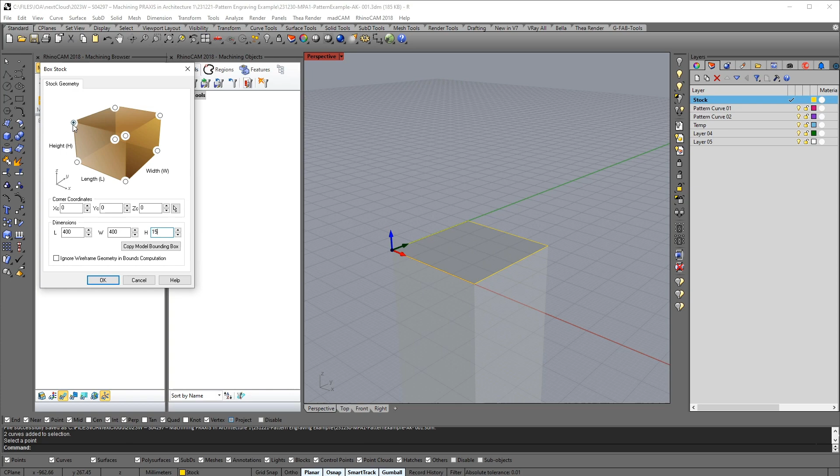And then I define the stock. I pick the upper point and the 0, X0, Y0, basically 0 and 0, 15 millimeters height, 400 by 400. If I click here, I'll get an update. Okay, so here is my stock. The color of stock in my RhinoCAM is different. I changed it. If you have the default settings, probably you have it in orange color.

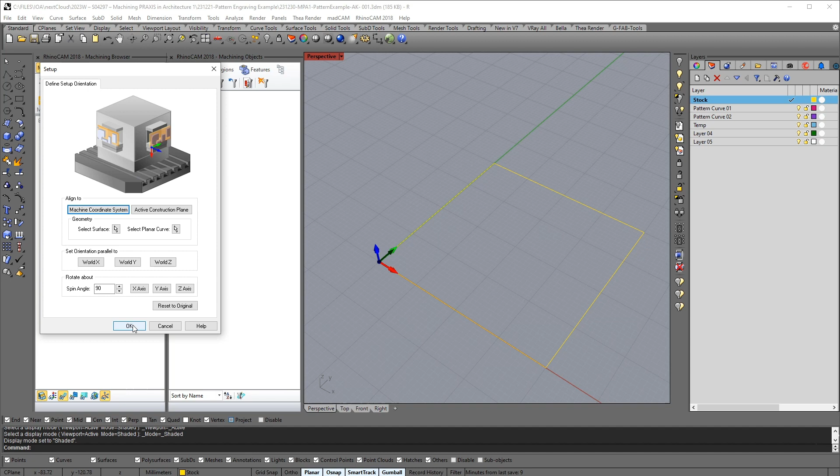And next thing, we need to make a setup. So click on the setup, make a setup. You don't need to change the settings right now because we are going to go with the default settings for a 3-axis milling. Okay, and renaming this setup. Okay.

Let's make a few tools that we are going to use in this video right now. So create edit tools. The first tool that I'm going to make will be a ball mill tool. It would be, let's say, 19 millimeter ball. And so the holder diameter which we have here is 35 and 25.

These two values are really important, these holder diameter and holder length, in 3D operations. So you need to be really careful about them when you're engaged in making 3D operation files. Here we are basically producing a 2D operation, so whatever you put here doesn't matter that much, but get used to using proper values. So the shank diameter for my tool is 8 millimeters, the tool that I'm going to use here, and the tool diameter, as I said, it is 19.

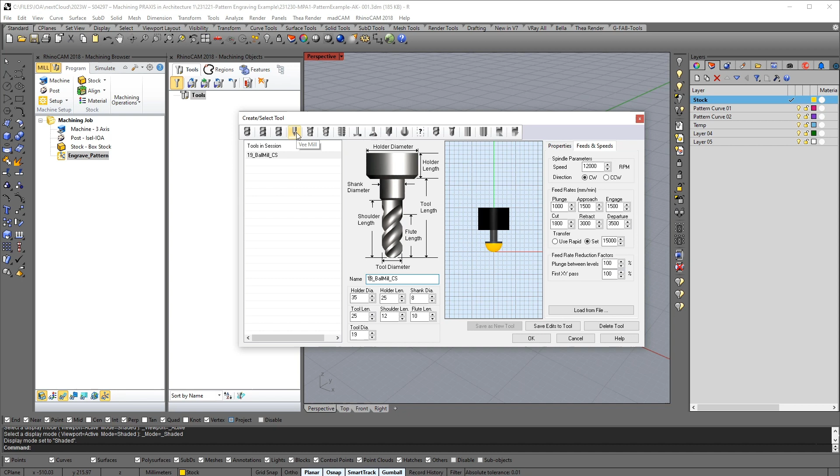And then I'm going to make another tool, this time a V-mill actually. So it's a 90-degree V-mill. So the holder diameter again, 35, 25. Shank diameter 8.

Taper angle is 45. Basically, we call this tool a 90-degree tool because this degree is 90 here, but the taper angle is the angle here. So you need to make sure that it is half of the real angle that you see in the specification sheet of the tool.

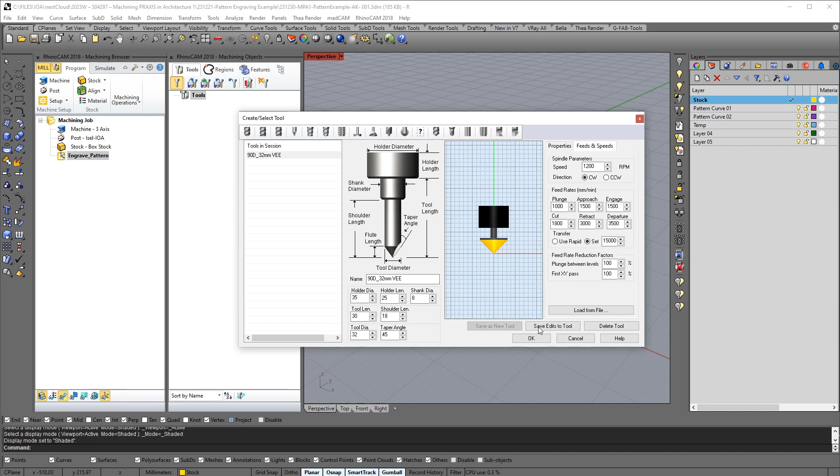So make sure you use save as new tool, because right now, if you save edit to tool, it might save it on the previous tool that you had selected. So save as new tool and click OK. Now we have two tools saved here and we can proceed.

Okay, let me draw two curves here. I'm going to use this curve. So let's say 100 millimeters away from the boundary. I move it to my pattern curve, and then let's make another one as well. Okay, two curves. Okay, so I'm making two operations.

First one, two axis engraving operation. We select this one for the first operation. We choose the ball mill 19 millimeter and the speeds you load from the tool. And sorting, we have only one curve, so we don't need any sorting. Entry, exit, none, that is fine for this operation. Cut parameters, tolerance is okay.

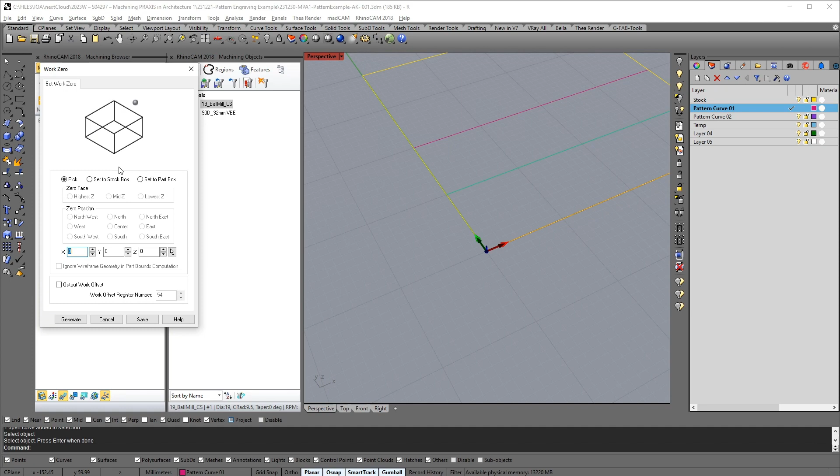Cut direction, natural. And this is important. Location of cut geometry at top. So this is my stock. And you saw that the 15 millimeter of the stock is below 0. And one thing I forgot to do here is to define the XYZ, the work 0 plane. So I save this at this moment. I just go back and I make a work 0. Select that. This is the work 0 that I'm going to use.

Generate. Make sure this work zero is not under your operations and it is above. Otherwise, it doesn't affect your operation and it affects only the operations that are below that. And every time you change the work zero, you need to make sure that you regenerate your milling operations. Right now, we basically just saved it and we didn't generate anything, so it doesn't matter.

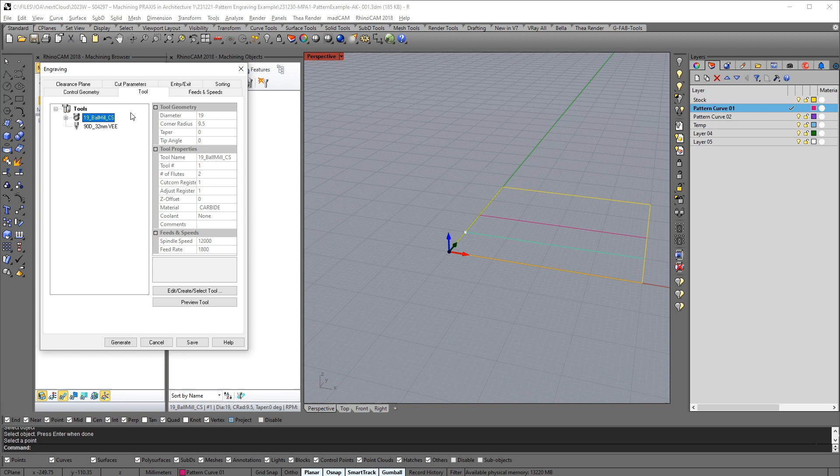We double click on the operation and we go back to the operation to define the settings. So in the tool, we have the 19mm ball mill selected, feeds and speeds according to the tool settings, sorting, nothing, entry exit, none, cut parameters, natural, and location of cut geometry at top.

So the stock is below zero, and so location of cut geometry: my curve is on the top. If the curve was at the bottom of the stock, I had to choose at bottom. So these are settings you can check on your own later, but for now at top is okay. And then cut depth control, total cut depth, rough cut depth, and finish depth. This defines the depth of my cut. For the first operation, let's choose 5mm, and we cut this all at once.

And then clearance plane, never use automatic, that's dangerous, specifically if you have a messy file and you have a lot of things there. The best options are part max or stock max or absolute Z value, every time you know something about it. So stock max, we defined this stock and we know that, okay, 12mm above the stock, that's a safe plane and it's fine for us. And cut transfer method in the clearance plane.

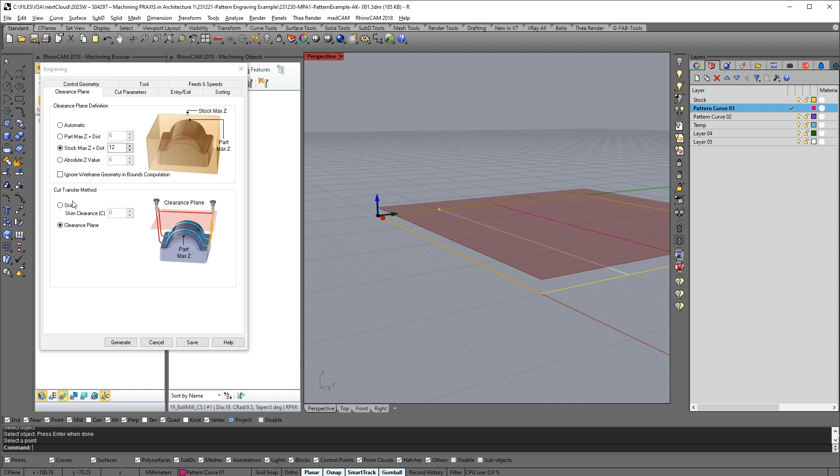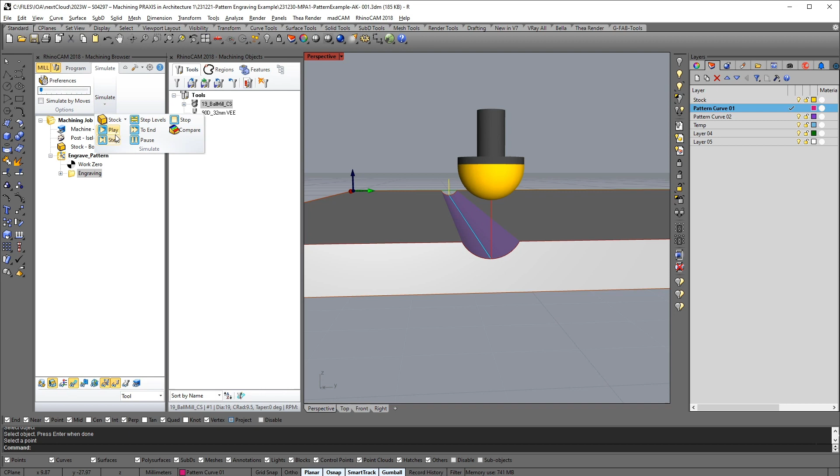So every time it goes to the clearance plane, I explain the scheme in other videos, and now we generate that. So here we have the tool path, if we turn it on or off, and if we simulate that, you see this is the effect of my tool. Let's make it slow. So this is what happens to the material.

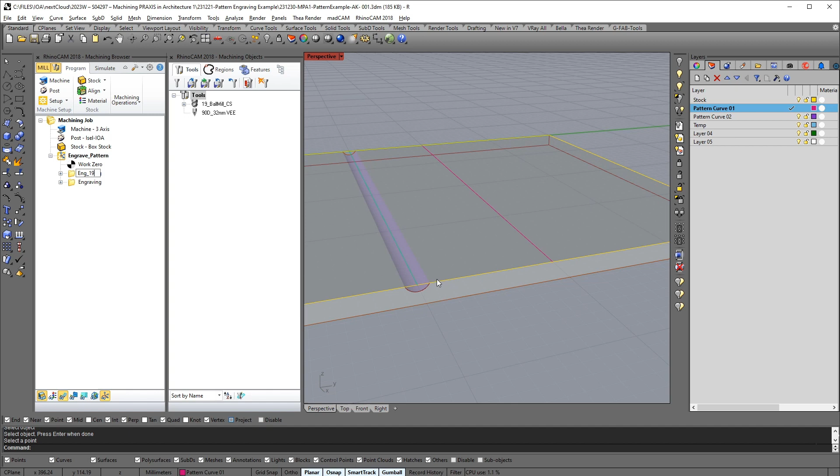Now imagine that we make the same operation with another tool. Actually, I can Control C, Control V. Let's make this Eng_19mmBall, and this one Eng_90DVEE. Okay. So this one, I remove this control geometry and I select another one, this one, and I change the tool.

And let's choose a different cut depth. Here I choose, let's say, 10mm. And I cut everything all at once. So 10mm rough cut, and then rough depth 10mm at the same time. Let's see what happens.

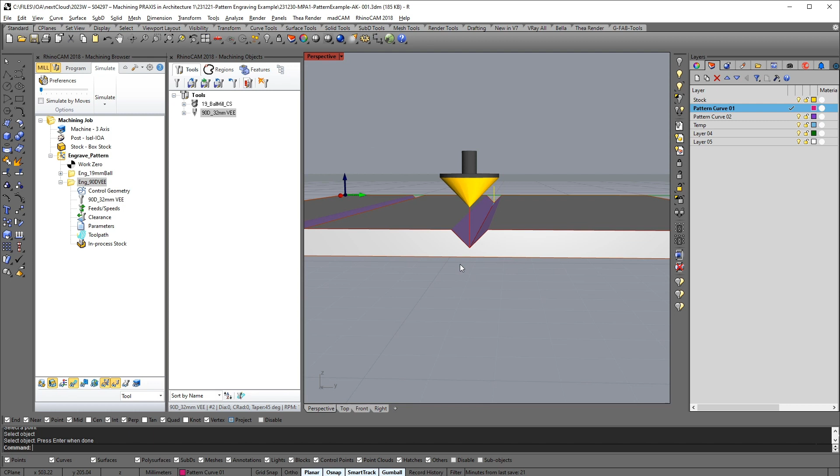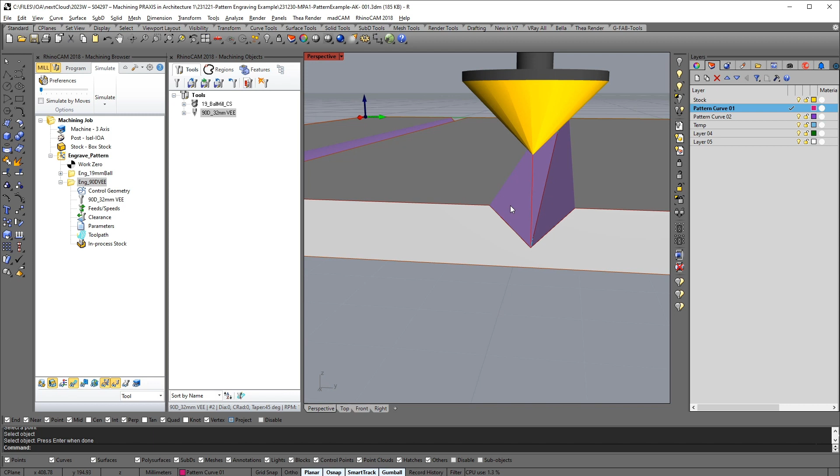Here we have a V. First thing to know: sometimes this is a lot of material for the machine, for your spindle, to be removed all at once, and it can damage the tool or burn the piece or burn the flute of the tool, so many things. So you basically need to divide these into two or more passes.

So what we do, we go to the cut parameters, and we can divide these 10mm. For these 10mm, two passes should be fine. And because our tool is a V-mill, the first pass can be deeper and the second pass should be less deep, because the amount of material removed with the first pass is less because of the tip of the tool, and when you go deeper it removes more material.

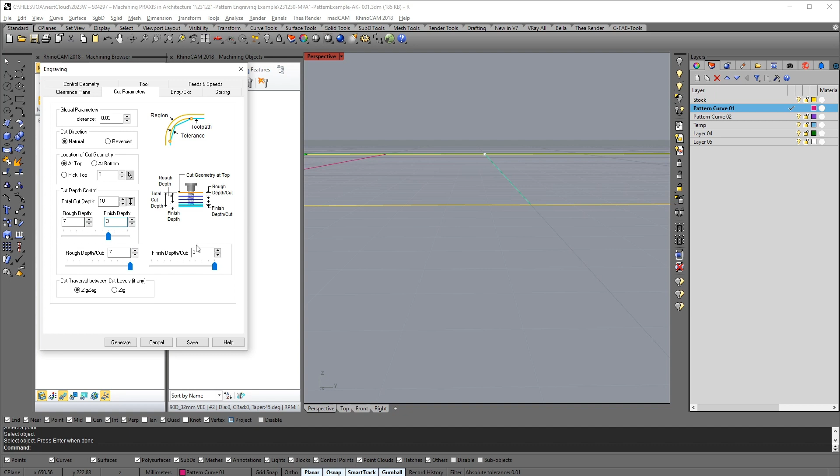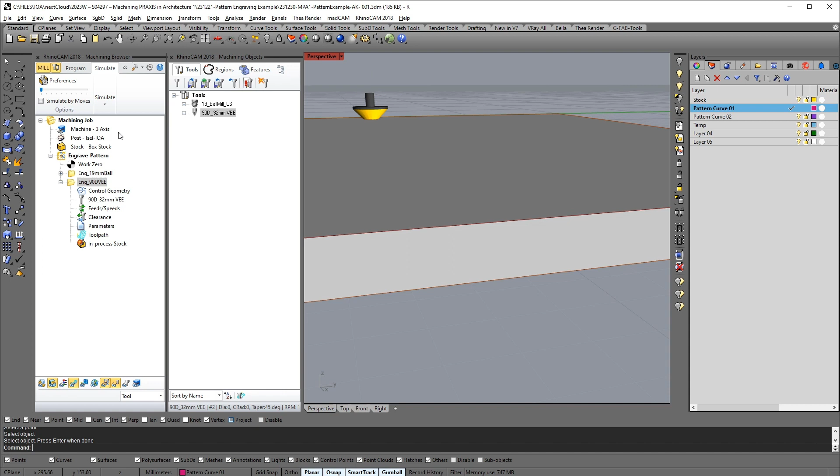So the first cut can be, let's say, 7mm, and the second can be 3. So we have two cuts, 7 and 3mm. If we generate, you see that the first cut is 7mm deep and the second is altogether 10mm, but actually the amount of flute which is engaged with the material is only 3mm. So let's simulate and see what happens. Fine.

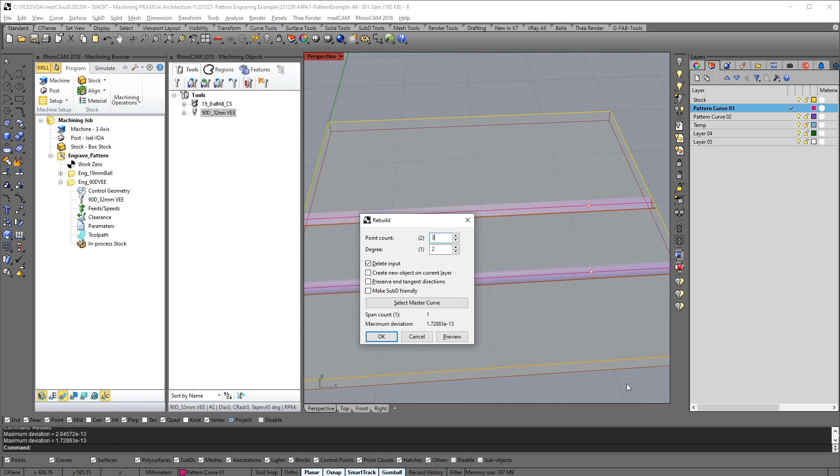Now, what happens if I change something about the curve? Imagine that I select both of these curves, and they have only 2 control points, so I rebuild them with three control points. Then I move this middle control point 5 millimeters up. If I go to the front view, you see that these two curves are now 5 millimeters above the stock.

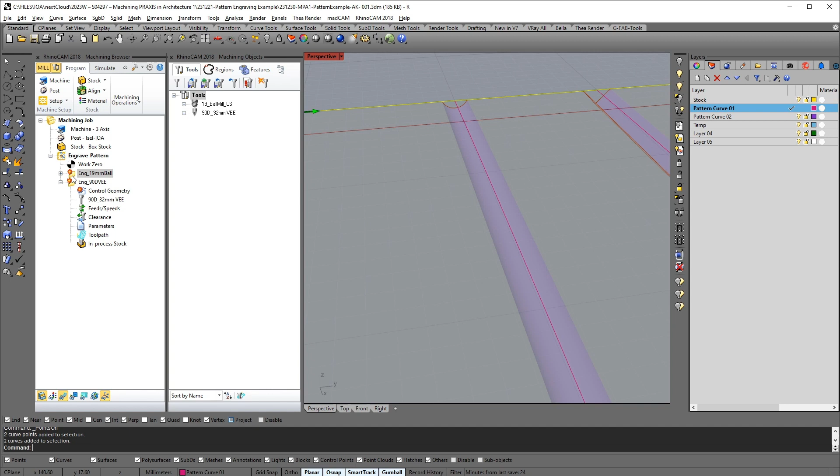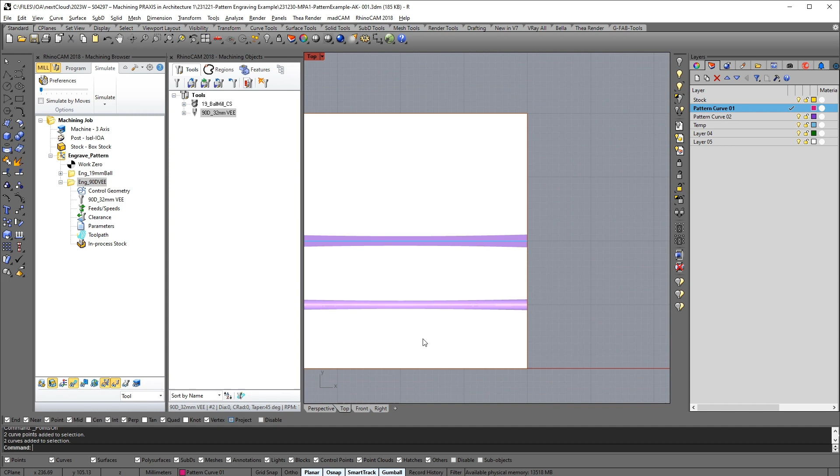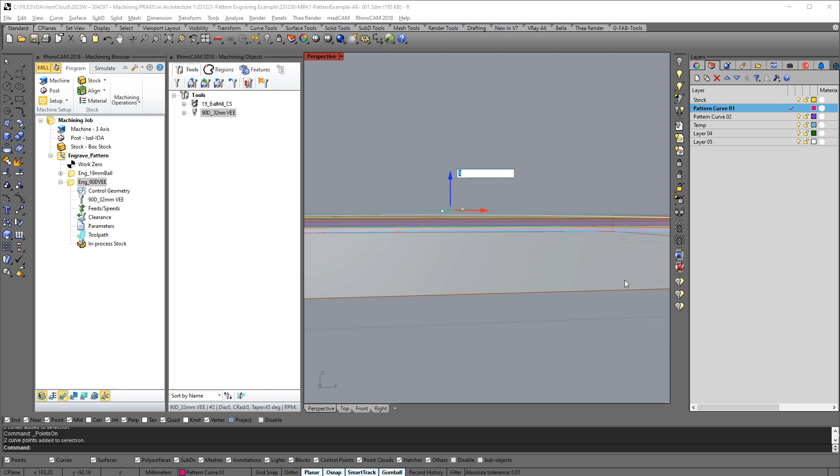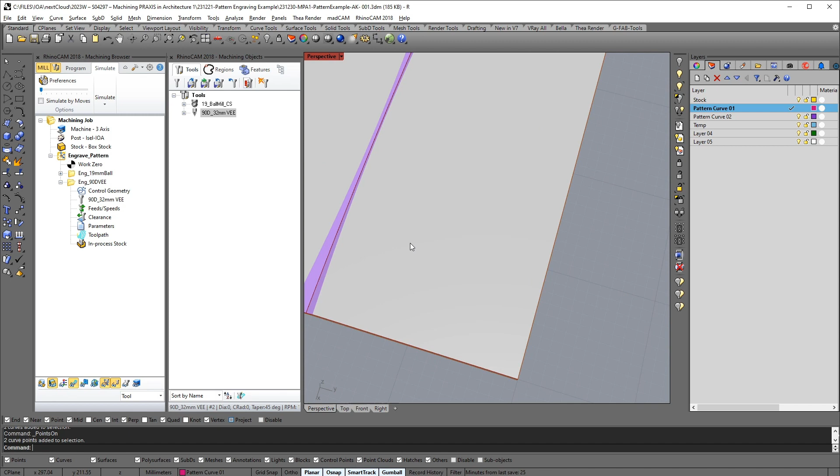Let's regenerate both of the operations and run them again. So you see the change of the profile from the top view. Actually, let's make it more clear. So I select the curves. So here you see it only cut this much, and here like that. Just imagine how many different capabilities we have with such a simple operation.

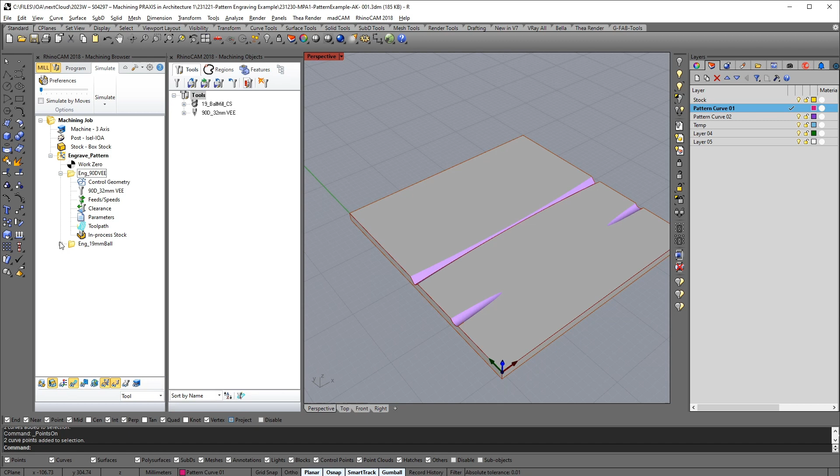Okay, let's move this 90 degrees tool to the top, remove this one, and go to the top view. For now, I turn off my simulation and I make sure that my project is on. This is something you better get used to whenever you are working in the top view, specifically with milling, because then you make sure you're not messing around with the curves. I lock the stock, so I make sure everything is all right.

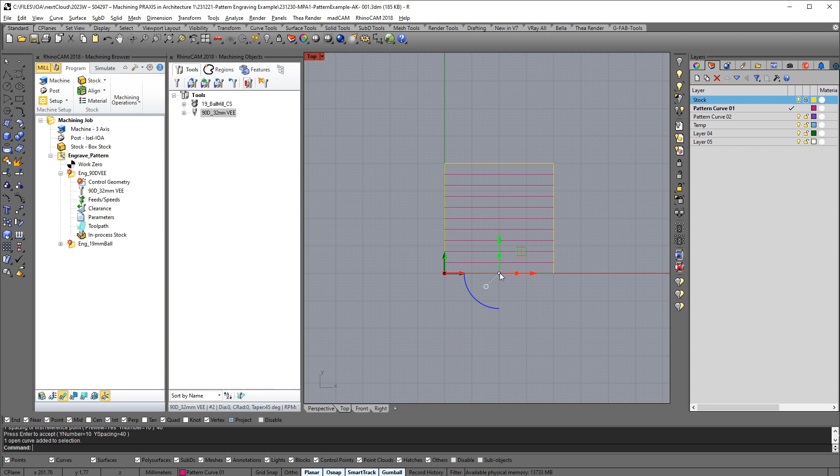And now, my stock was 400, and if I make an array in x direction 1, in y direction, let's say, z direction 1, and the spacing, it's 400. Let's say we need 10, so the spacing of 40 should be fine, and enter. Okay. Let's copy one more there.

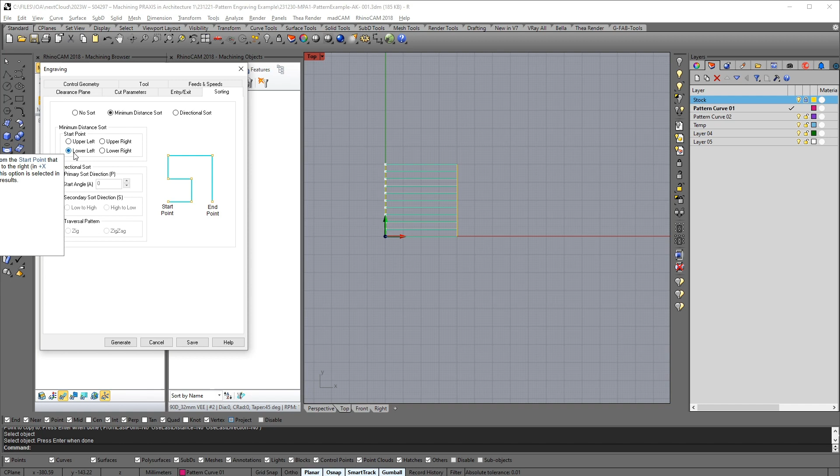Okay. So I go back to the engraving, remove all, let's select all of them. And here we can have a minimum distance sorting, and lower left is okay. Generate, simulate, play. So this is what we have here.

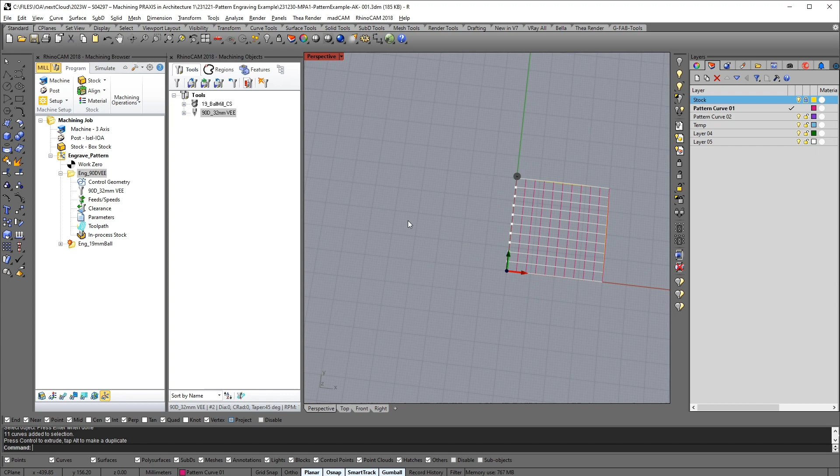And just imagine that I can select all of them and rotate them 90 degrees. Make a copy, remove all, select, generate. Okay, simple. And you can play endlessly with these.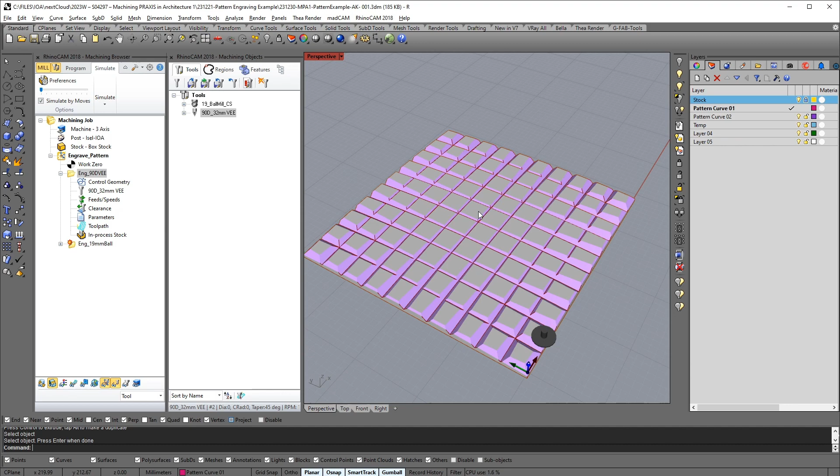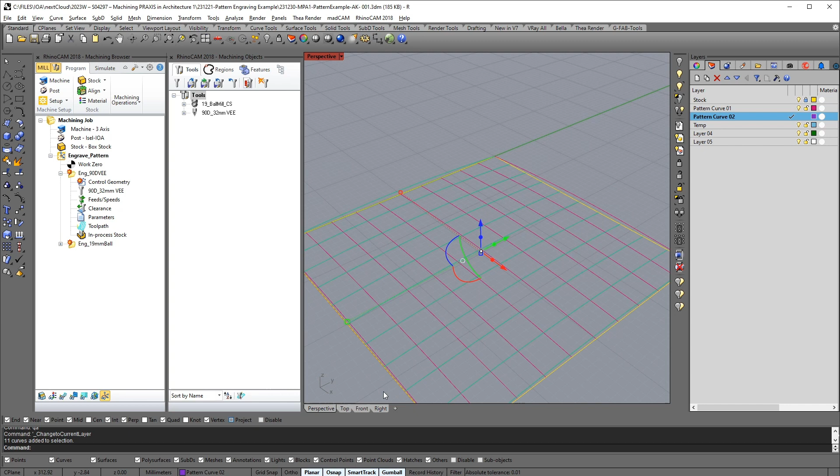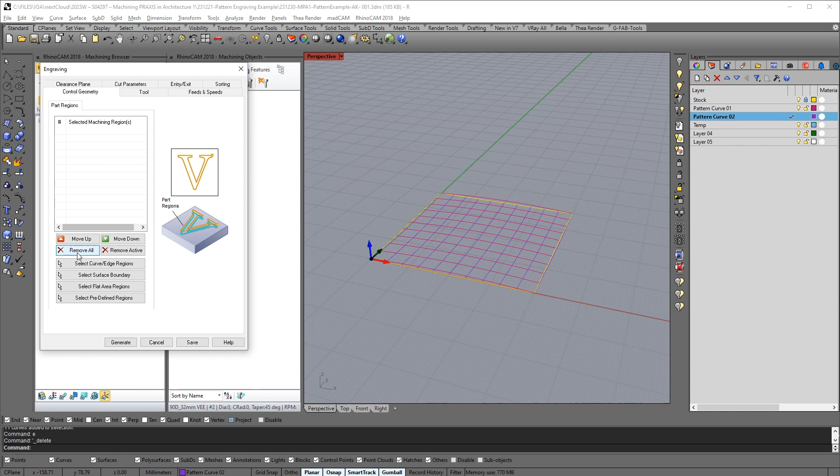Another example would be, I can Control Z, go back there, I select this, Control V, copy in place. So I go to the layer, and this time I go to the front and I simply use the scale, or I basically mirror these curves. Let's see what happens now. If I go to the engrave again, select everything, generate.

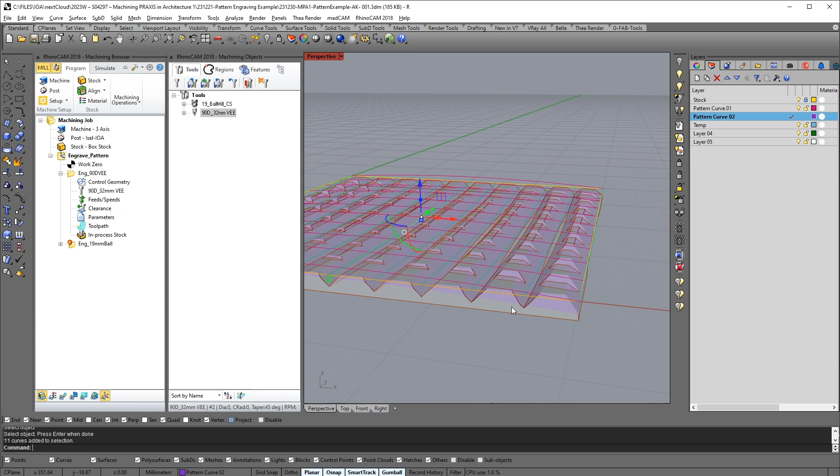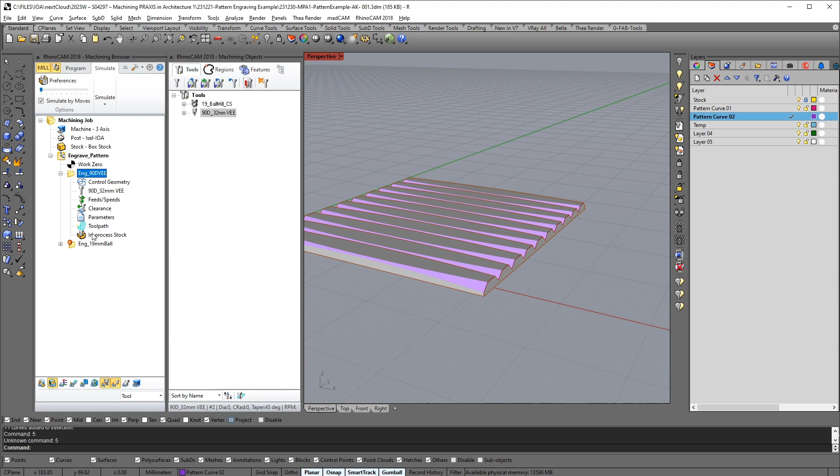Too deep. This is because of the curves I basically mirrored. Now I would say 5 millimeters or 8 millimeters. I'll move them to the top. Okay, that was too much. Minus 5 millimeters.

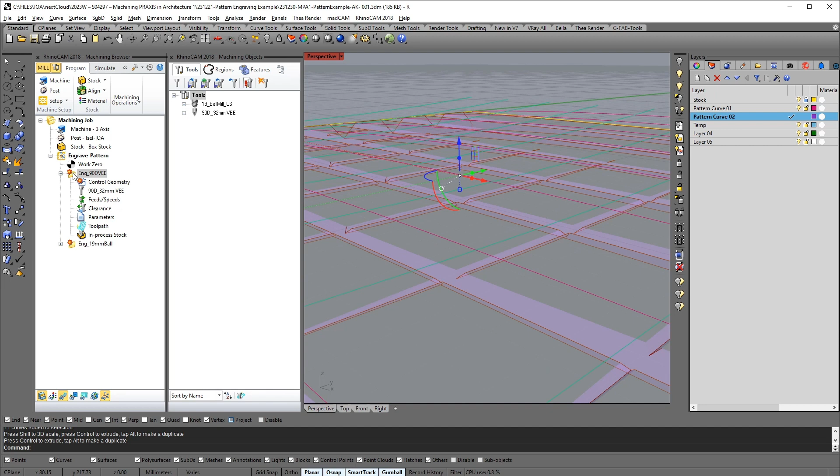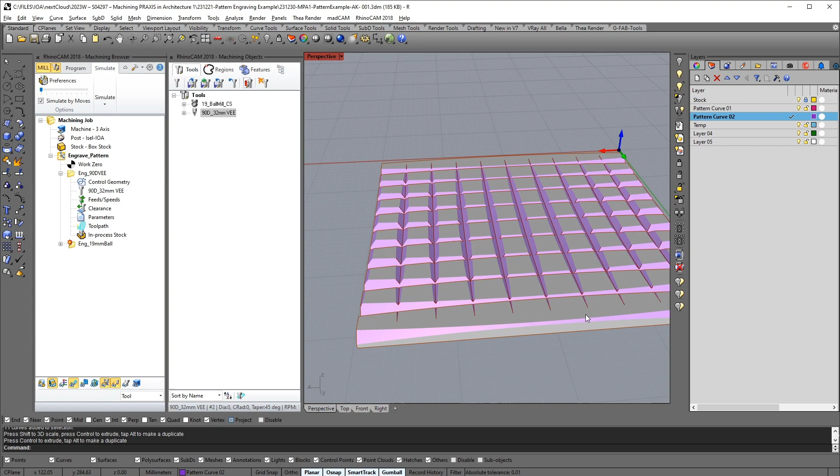Okay, something more different now. You see, you can have a lot of different patterns with this technique. You can play around and follow any sort of curve or whatever you would like. Okay, let me show you one example of these sort of patterns.

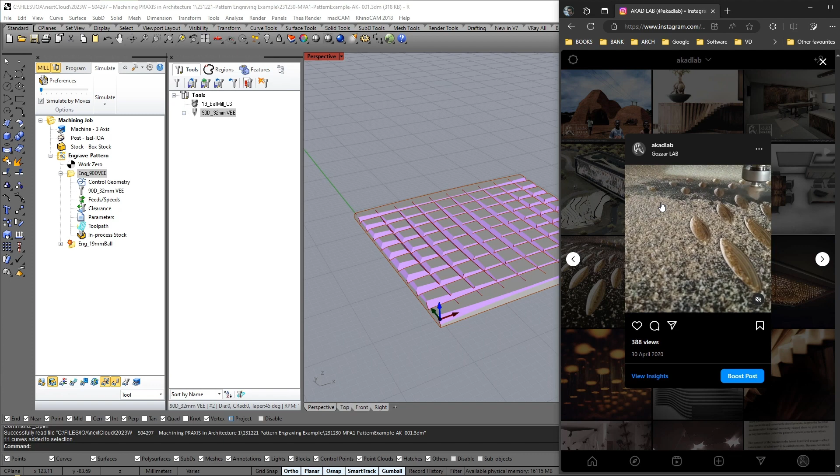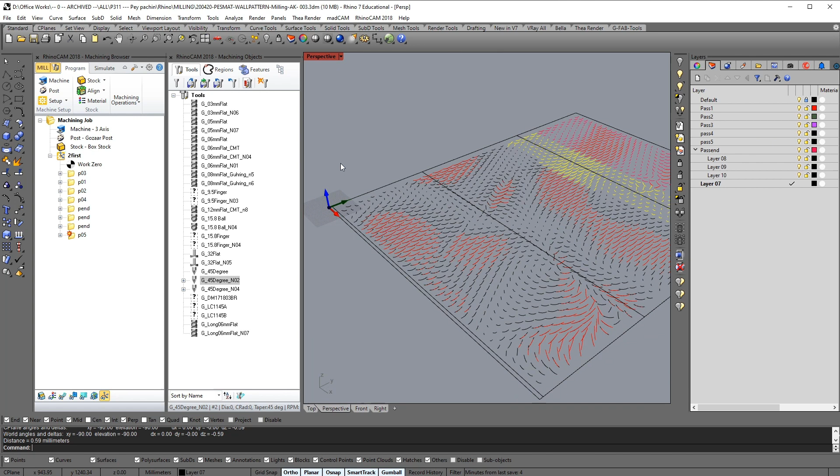So this video shows the actual cutting process of a pattern which is designed and implemented with a very similar technique I showed you in this video. And if you would like to look at the file, this is the file for that pattern for the video, and you see that these are very simple NURBS curves which are defining the form, and this is the simulation of the process that you see here.